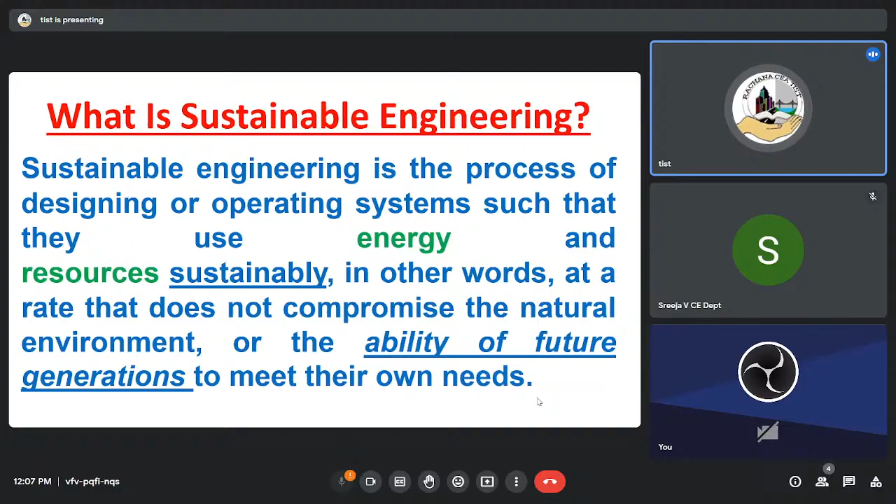Having understood the need for sustainable development, the UN in 2015 published the SDGs. I'm not going to detail them, but you all know the SDGs emphasize the interconnected environmental, social, and economic aspects of sustainable development.

I will not go into detail on all of them, but now there's a question of whether we can reach the set target. Time is moving very fast. Now we have set the deadline as 2030 - can we reach this target? That is the big question we have. Do we have conventions every 2 years, 5 years? We discuss, we pass new rules, but practically, can we meet this demand? So can we ensure the future we want? This is the question we have to understand.

Then we come to the question: having understood sustainability and the need for sustainability, why innovative solutions? As I mentioned in my inaugural speech, the current day issues are technically, financially, environmentally complex. Why do I say so? You all know my specialization is in water resources and hydropower. The potential in many countries has already been exhausted - we have harnessed whatever sites remaining are very complex, either geologically complex or with other technical issues, even equipment selection is in many aspects technically complex.

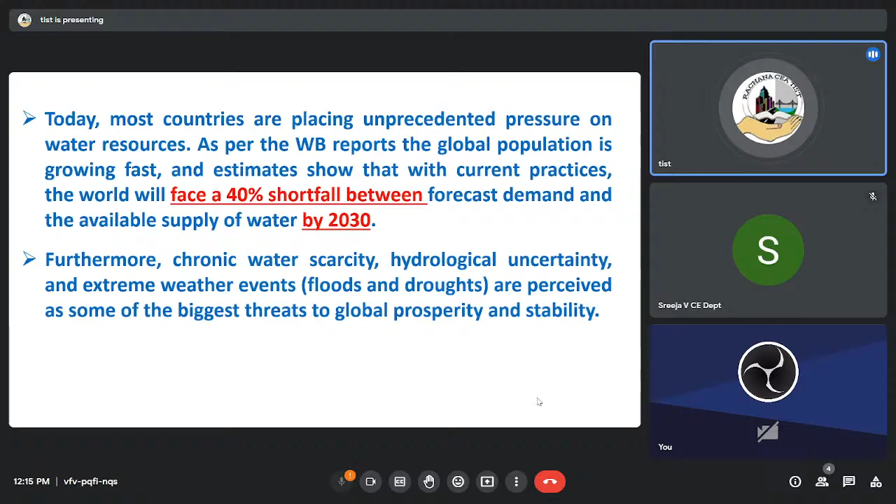Now, these are with all the SDGs and other regulations in place. Furthermore, chronic water scarcity, hydrological uncertainty, and extreme weather events - floods and droughts - are perceived as some of the biggest threats to global prosperity and stability.

Feeding 10 billion people by 2050 will require a 50% increase in agriculture production. That means, as I mentioned before, which consumes 70% of the fresh water demand - how are we going to meet all that? And a 15% increase in water withdrawals.

Besides this increase in demand, the resources are already scarce, and in many parts of the world, estimates indicate that over 40% of the world population lives in water scarce areas, especially Africa, and approximately a quarter of the world's GDP is expected to be exposed to this challenge.

By 2040, an estimated 1 in 4 children will live in areas with extreme water shortages. Water security is a major, often growing challenge for many countries today. This is just to emphasize the importance.

And also, if we go further, climate change will worsen the situation by altering hydrological cycles, making water more unpredictable, and increasing the frequency and intensity of floods and droughts.

Roughly 1 billion people living in monsoonal basins and 500 million people living in deltas are especially vulnerable. I think you all saw what happened in Pakistan recently. And the reverse happened in Malawi - one of the biggest reservoirs depleted completely. Lots of people were depending on that reservoir. So totally the opposite happened there.

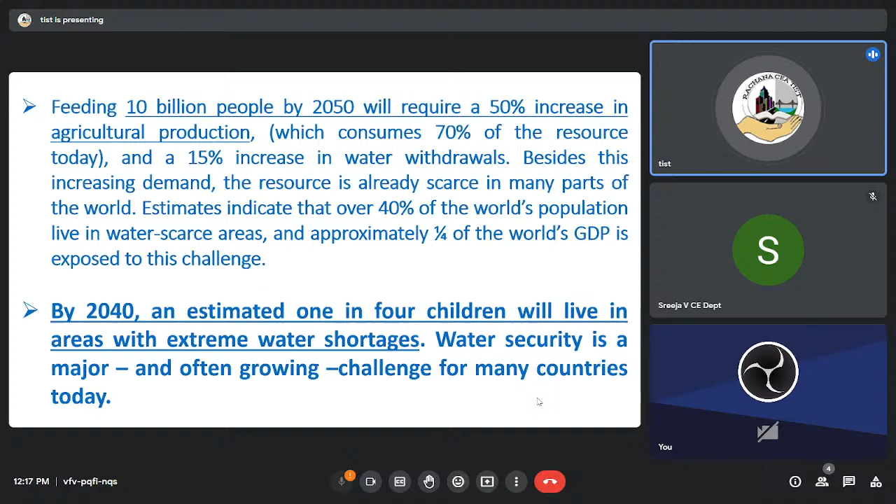The 17 UN Sustainable Development Goals set ambitious targets to date. Success in meeting the goals has been limited, and with 2030 less than 7 years away, it seems highly unlikely that many, if any, targets will be met. This is what I mentioned earlier, so this is a question we need to ask ourselves.

We also find that the public's perception of water availability is lacking. They have no concept of how much water they are consuming. For example, they estimate daily use per person is around 20 liters, when it is actually close to 150 liters. Education is a big issue, and the role of government and media in many instances is inadequate.

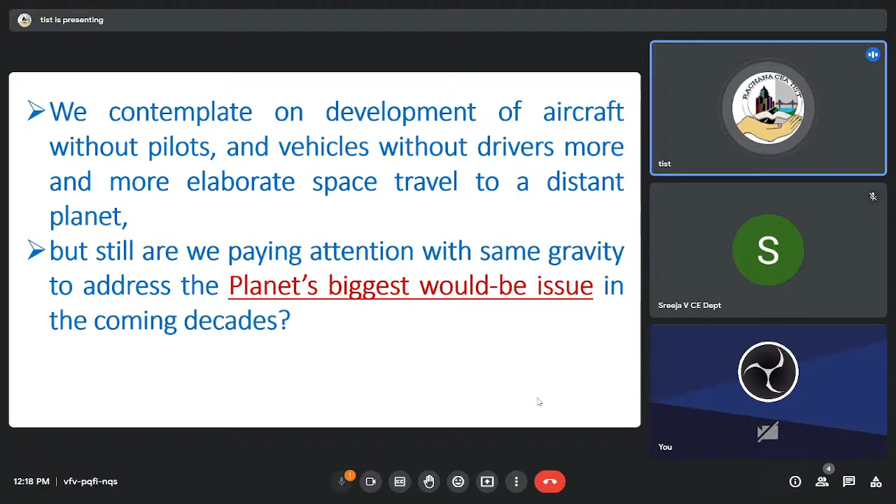So we complain that if you look at the research today in the world by developed countries, we contemplate development of aircraft without pilots, vehicles without drivers, more elaborate space travel to distant planets. We spend billions or trillions of dollars in this type of research, but are we paying attention with the same gravity to address the planet's biggest issue in the coming decades? This is a question we need to ask ourselves.

I quote a very interesting statement by a veteran water professional. Maybe you've all heard this, from the International Water Association Director General, Dr. Kala Vairavamoorthy. He mentioned this, quoting what his father told him. I think this is especially for the young engineers who will like it, it's a very interesting one.

He says, I quote him, 'We are the custodians of water. When you use water, think of it as taking a book from a library. You take it on loan and use it wisely for your benefit. When you finish using it, you need to return it in a condition knowing that someone else is going to use it after you, that you might want to receive it yourself.' Unquote. It's a very interesting message for the world.

So this philosophy stood in my country. I think, of course, in India, we are aware that the great kings of ancient India, 2,500 years ago, developed one of the finest hydraulic civilizations of the world. If you look at the ancient hydraulic civilization both in India and Sri Lanka, there are still some theories we can't understand. I want to mention one example.

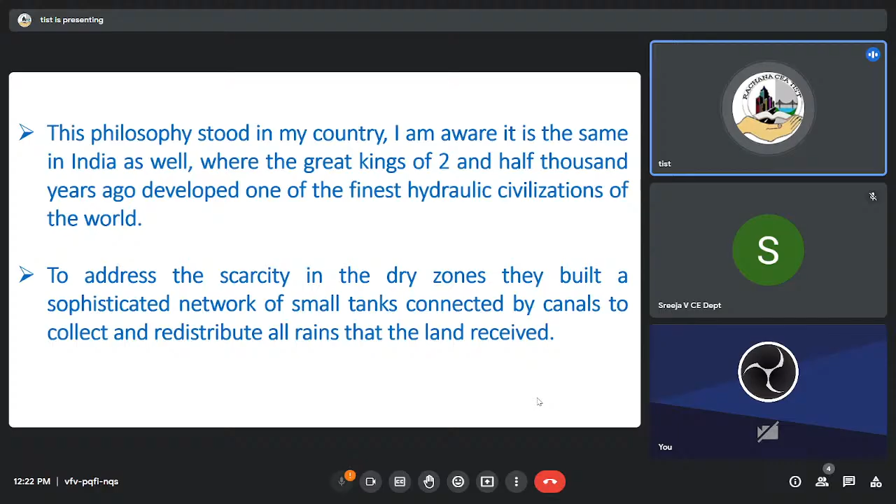He is actually a very honest and humble person. He said he couldn't believe, having seen our old canals and old reservoirs - today we design structures for a 100-year lifetime, but we have dams more than 2,500 years old. I think it's the same in India. So where are we? Where is this technology? How did we miss it, still?

But today I'm going to move on to this: these tanks were built in a cascading system using the natural topography of the land. The multifunctional system supported agriculture, wild animals, and biodiversity, allowed rice to be cultivated all year round, regulated the local microclimate, prevented floods, and controlled evaporation.

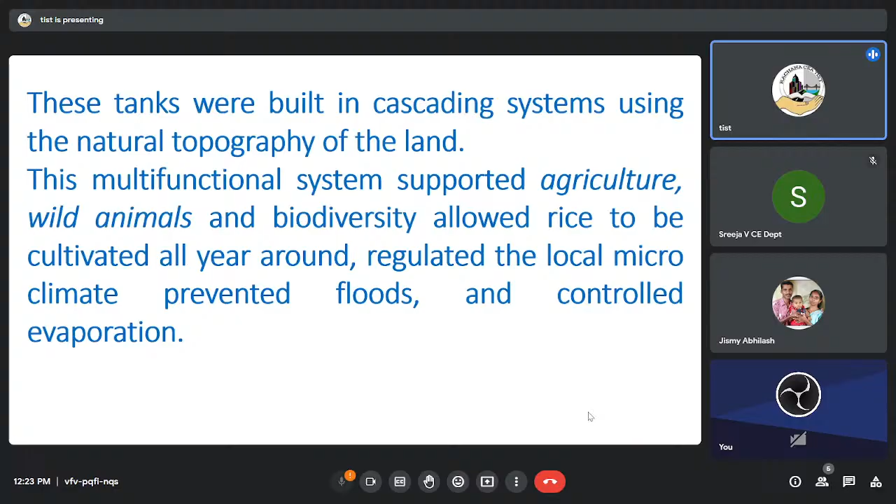But if you look at these systems, I have studied one ancient reservoir system - they have small tanks surrounding the main reservoir to catch sediments. That is how they planned it, so the main reservoir stays intact. They never faced a sedimentation issue. They also used various technologies for water release control, but today, unfortunately, we are still trying to understand the theories they used at that time.

So I found it very interesting - with this system poorly understood by modern day engineers, knowledge was lost and infrastructure was either neglected or allowed to be destroyed, particularly during the colonial era.

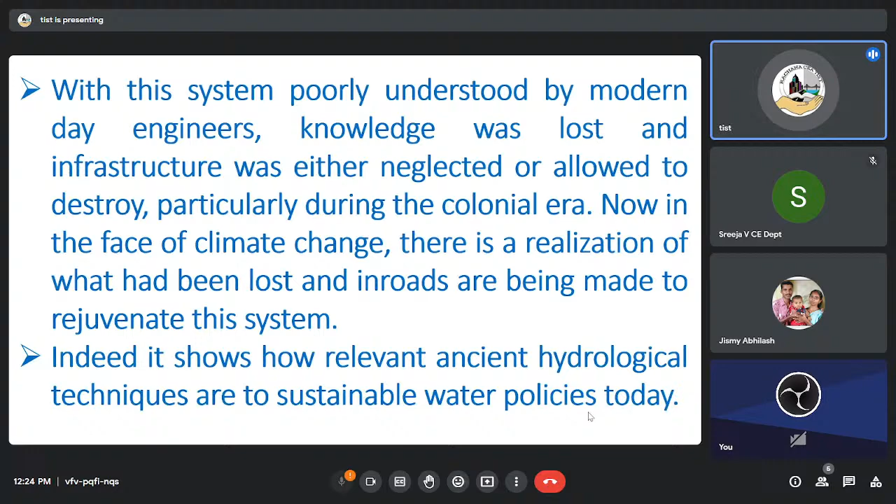Now, in the face of climate change, there's a realization of what had been lost, and inroads are being made to rejuvenate this system. In Sri Lanka, with modern day planning and all the new sophisticated software, we have developed water resources schemes. Some do not get sufficient water, some are filled with sediments, various issues.

But at the same time, when developing all this, we have ruined the old canal system. They were built along the contours, so we still do not know why they selected those particular heights and levels at those particular locations. By neglecting those, we build new ones with modern technology, but they have failed to serve the purpose.

So this is something we need to dig into, the ancient theories, ancient engineering, and see where we have gone wrong. Therefore, it's of utmost importance to conduct applied research to understand those ancient technologies and to see the possibility of engaging them in today's context as innovative solutions.

I think this is applicable to many countries. We all have a similar background, but unfortunately we have not paid attention. You may have heard about the fortress in Sri Lanka called Sigiriya, nominated as a world wonder. We are trying to find out how they pumped water up. There are swimming pools used by the king, and we find pipelines constructed on the rock, pieces of old pipes also there, but still we do not know how they pumped water up to that level.

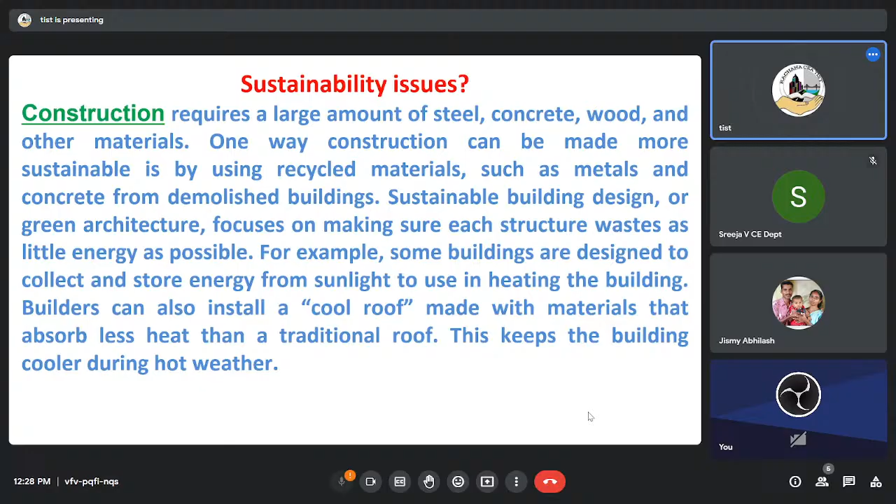So again, under construction, we need to think about sustainable sites, that is selecting sites, then water efficiency - large construction sites are connected with huge water demand. Similarly, materials and resources, energy and the atmosphere. So when we address the construction sector, it covers a large wide area of items as I have just listed, and there we can have many innovative solutions.

Yes, I think if you check, many institutions are doing research on alternative materials. I think we have gone very far - we have done in-depth research and found many alternative materials, and they are being used. So similarly, most of these areas have been covered.

Then under innovative solutions, the other possibility is engaging digital construction. I think we have started this in some countries, already using digital technology in construction. Globally, the built environment footprint is expected to double in size by the year 2060.

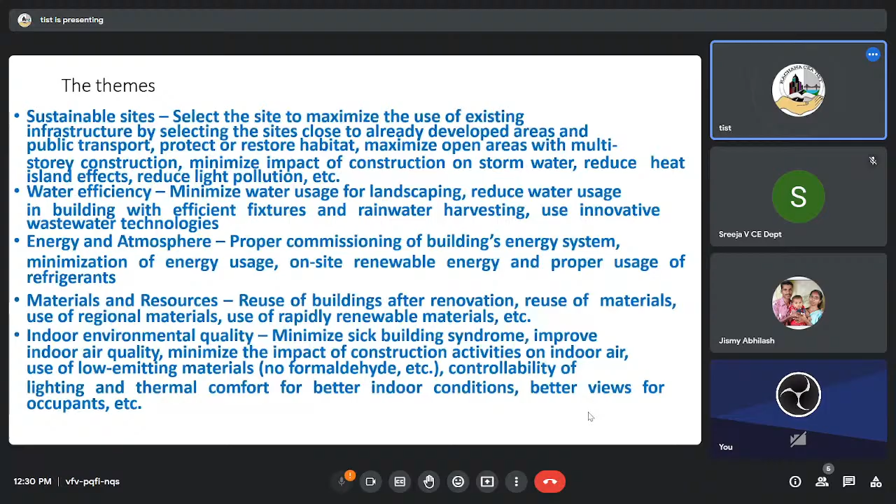For this to happen in line with the net zero target set by us, technology will have to play a lead role in improving the way construction is carried out. I think you're all familiar with the targets now in Sri Lanka. Our net zero target is 2050. That's the target set by the government, but we're not sure whether we can get near to it. I think similarly in India you have your own green energy targets and net zero targets, but to be realistic, this is one major area we need to be concerned about.

Getting into digital construction can be considered one major contribution. So for technology to advance our construction techniques, digital literacy is going to be required in all practices and all phases of construction. I think you're all familiar with BIM.

BIM is widely used, but we can't simply put BIM in directly, so we need some preparatory work. There are cost constraints, it's not all projects we can adopt it for. We need to use it from the pre-construction process to final O&M. But some stages we can directly use, to put it in the full phase you need to do more.

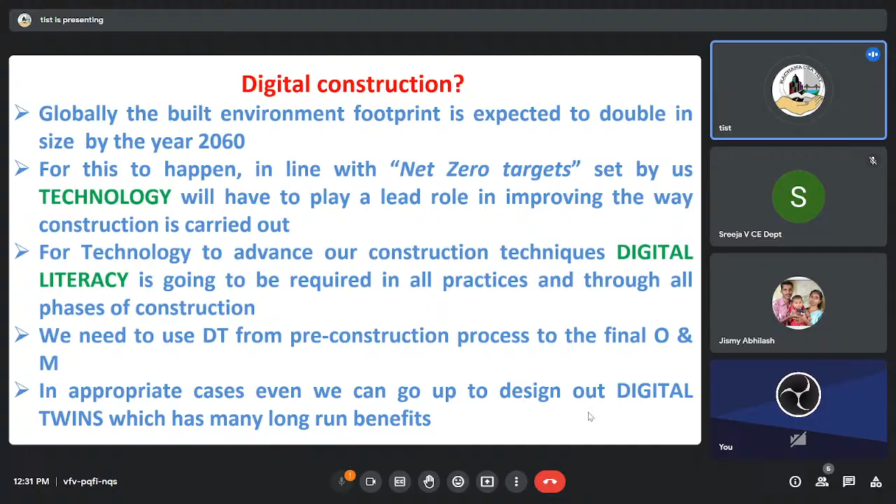So to make this a practical reality, the technology will have to be easy to develop, deploy and adopt, as I mentioned earlier. If deploying technology requires weeks or months-long training on the ongoing work, it will not happen. The developers or clients will not agree to do that because it involves cost.

But in the long term, we need to get ready with our university education, our training colleges, and through various other programs like CPD programs, we can apply this for practicing engineers. So in the long run we need to invest more in improving digital literacy, especially by the contractor. We have to build up the required digital muscle in organizations. In all the major organizations we need to give more concern to digital applications in the construction industry. That's why I said we have to have a separate arm for digital muscle to be successful in the future.

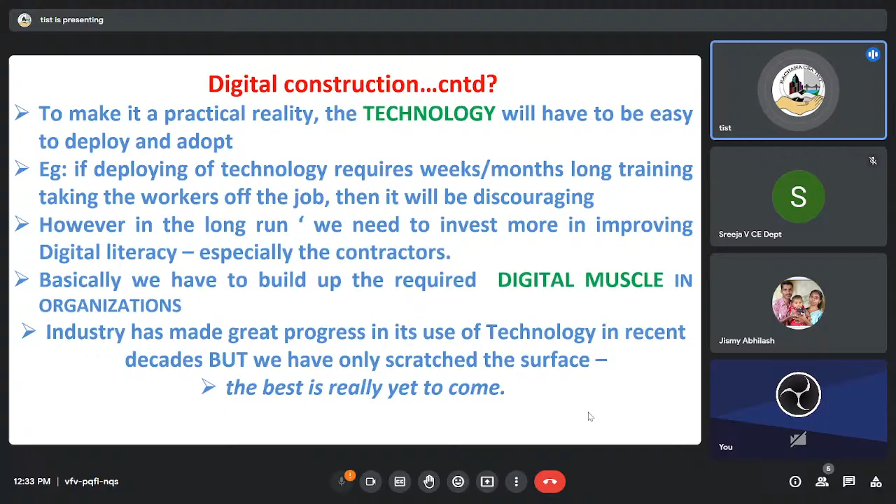The industry has made great progress in the use of technology in recent decades, but we have only scratched the surface. The best is really yet to come. With digital applications, you can do more in this sector.

Next, I'd like to talk about energy sustainability, the other important area. The energy sector is undergoing rapid transformation with the adoption of new technologies and increasing focus on sustainable energy solutions. The transition from fossil fuels to renewable energy sources is gaining momentum, and new innovations and trends are shaping the industry's future. Most countries have defined their renewable targets by now.

In Sri Lanka, the government target is 70% renewable by 2030. When you say 70%, we have already exhausted our hydro potential. The rest we have is mainly solar and wind. Yesterday I learned that your airport is a totally solar powered airport, from Dr. Vasudev, so it's very interesting. There are many such initiatives we can do in the energy sector.

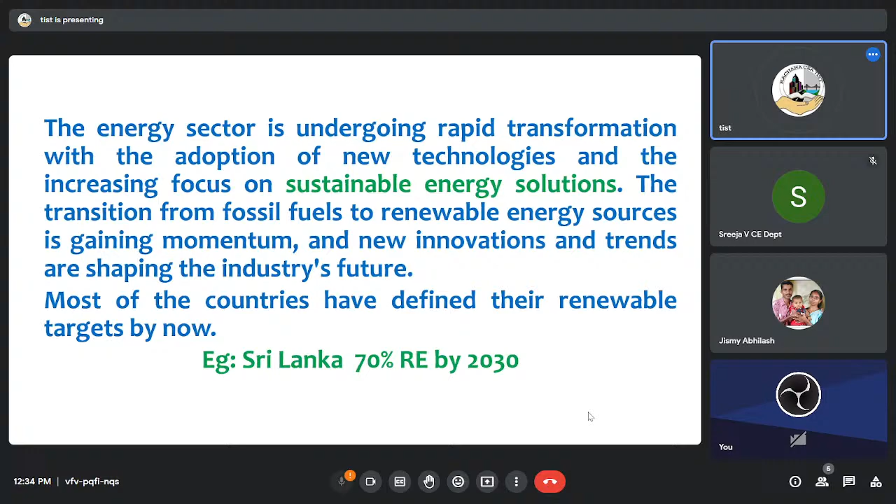But again, as you all know, the problem with renewables is intermittency and cost. So can a country like us simply be 100% dependent on solar? No, it's not possible because there are technical constraints, and also economical ones, because though solar is free, the conversion mechanism is expensive.

The future technology says solar cells will be printed like paper. I've read somewhere that in Germany they've already made the breakthrough, and it is coming to commercial operation soon, so that solar cells can be printed on any surface, curved or anywhere, like normal paper printing, and you simply connect the circuit and get the power. So there will be drastic reductions in cost in the future, and similarly for wind energy.

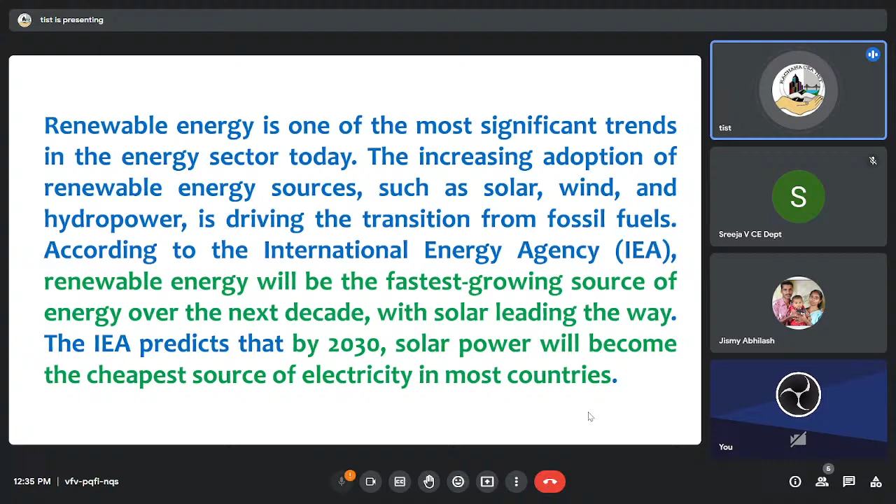Renewable energy is one of the most significant trends in the energy sector today. The increasing adoption of renewable sources such as solar, wind, and hydro is driving the transition from fossil fuels. According to the International Energy Agency, IEA, renewable energy will be the fastest-growing source of energy over the next decade, with solar leading the way. The IEA predicts that by 2030, solar power will become the cheapest source of electricity in most countries, and the future will be solar because our existing petroleum resources will deplete.

It says in 50, 75 years, right? But again, these are the predictions. And also with the coal and other thermal, with the climate change, the global warming, can we use it? Today, I think climate change is, I think we all experience very much the serious drought, serious floods, all that. In many places we see that these are results of climate change. So with that background, can we use those resources although we have sufficient quantity?

So renewable is the only answer. And again, the barrier is with the technology and the cost. So for that we need alternative solutions or the innovative solutions. So these are the areas we engineers need to focus on.

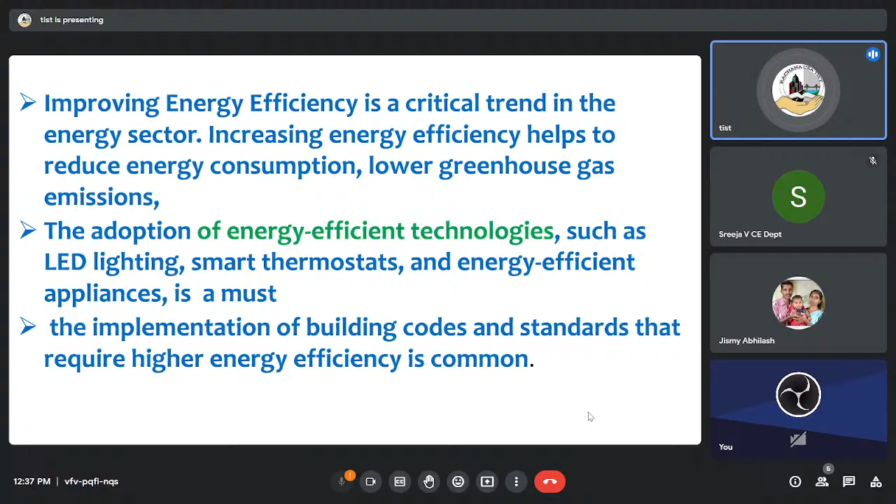The adoption of energy efficient technologies such as LED lighting, smart thermostats, and energy efficient appliances is a must. So the implementation of building codes and standards that require higher energy efficiency is common. Same way we use find new technologies, we also need to have our regulations also in place, otherwise you can't simply adapt it. So those are the basic main areas I want to touch under the sustainability.

Now I want to share some experience in the innovative solutions in Sri Lanka used by our industry. Next please. So some statistics about Sri Lanka.

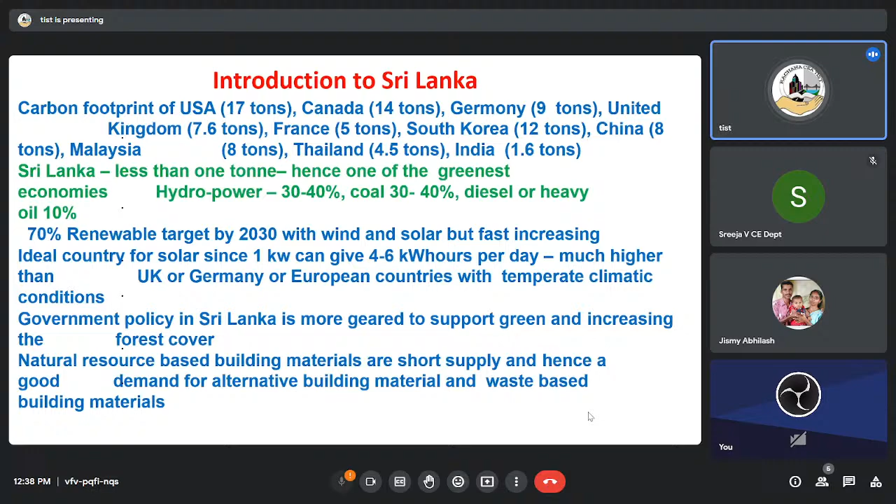The government policy in Sri Lanka is more geared to support green and increasing the forest cover. So that's also one concern under environmental sustainability. Natural resources based building materials are in short supply, and hence a good demand for alternative building materials and waste-based building materials. Now, energy sector, yes, we can go in the renewables.

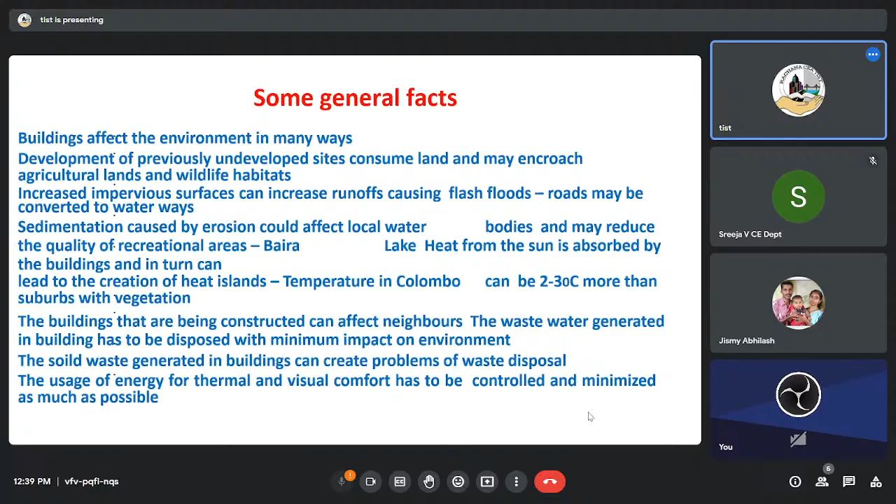In the construction sector, the innovative solutions we have done it mainly on the construction techniques and the materials. Yes, the different building materials. These are actually based on some of the university research, and they are being used at the moment, not in full commercial scale, but in small scale. They are being used, but soon it can come into full commercial scale.

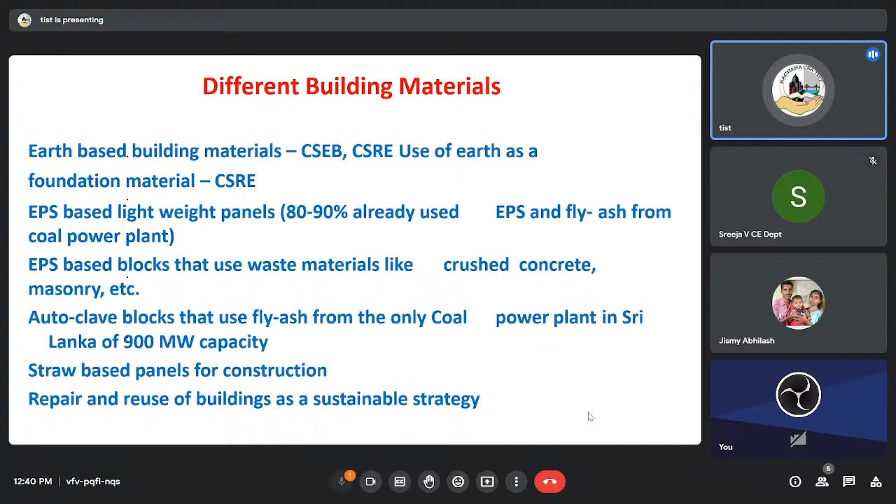I think maybe some of these you used in India already, you have done research. Then also we have an application with a straw-based panel for construction and repair and reuse of building as a sustainable strategy. And very recently they also introduced, normally in buildings we used to adopt 4-inch thick walls as partitions. So with the research they have done, they have found there is sufficient strength to reduce it to 2.5 or to 3 inch. There are practical limitations of construction, but still it's also a cost-saving solution and it has been identified as an innovative solution.

So the strategies are to minimize or mitigate. This is the water sector, what we can do under the strategies applied in Sri Lanka. So the stormwater

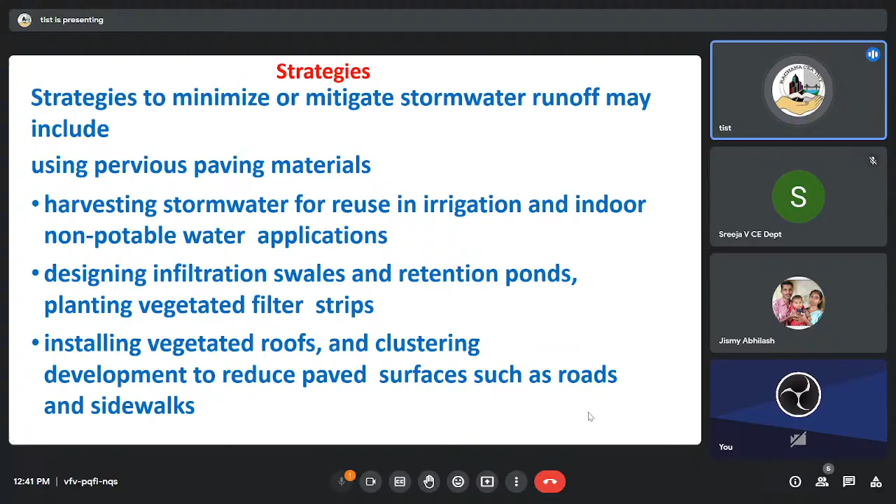runoff may include using pervious materials to reduce the surface flow. We're using pervious paving materials on the clay to absorb the stormwater, and also harvesting stormwater for reuse in irrigation and indoor non-potable water applications, designing infiltration swales and retention ponds, planting vegetated filter strips, installing vegetated roofs, and clustering development to reduce paved surfaces such as roads and sidewalks.

So these are some of the innovative work done in Sri Lanka in the construction industry. These are the pervious layers or the kind of bricks that you can use for surface laying, and it will absorb and transfer the water to the ground while reducing the surface flow.

It helps to reduce floods. If you look at now, most of the time we experience severe floods because of the extensive rainfall intensity that we experience currently due to climate changes, and our design waterways are not sufficient to cope with it.

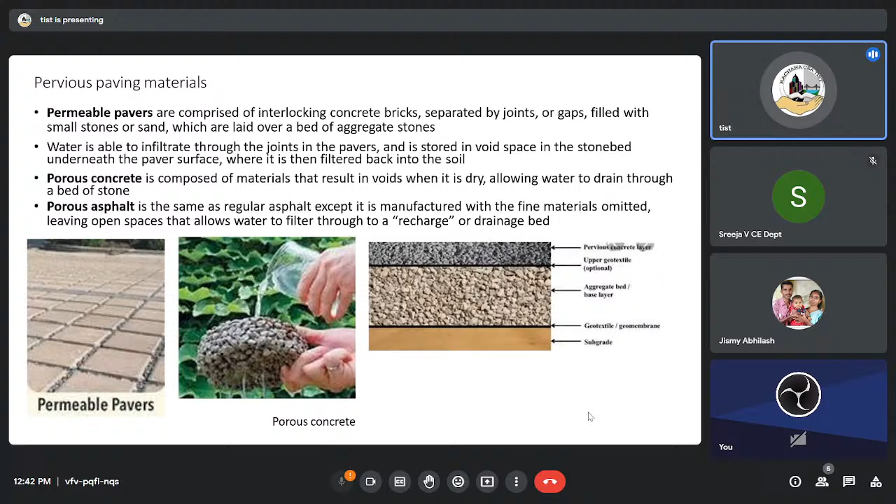So these are some solutions we can use in the public, private roads and the common areas, and also the techniques to prevent surface erosion. These are very basic.

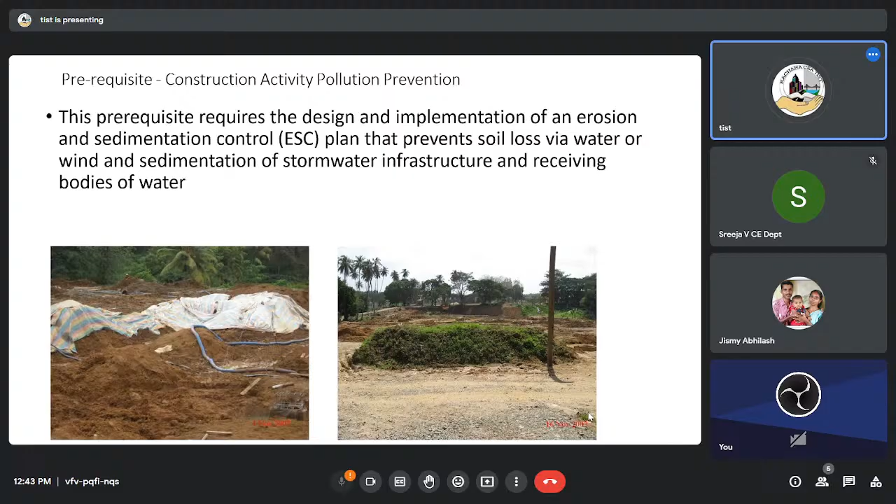This again is similar permeable paving methods they have developed. And this is the swales I mentioned. So without huge drain construction with concrete walls or rubble walls, a similar swale can be introduced, and it's environmentally friendly and also good in appearance, and it will drain the surface runoff without making a flood condition.

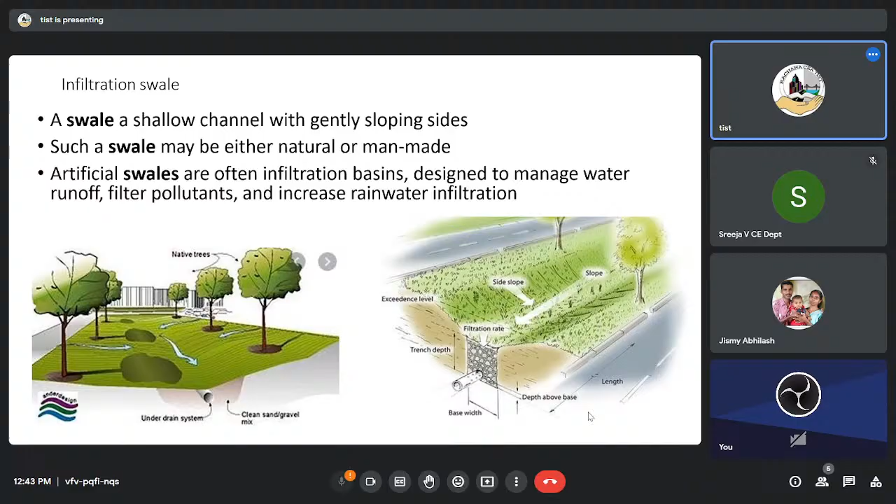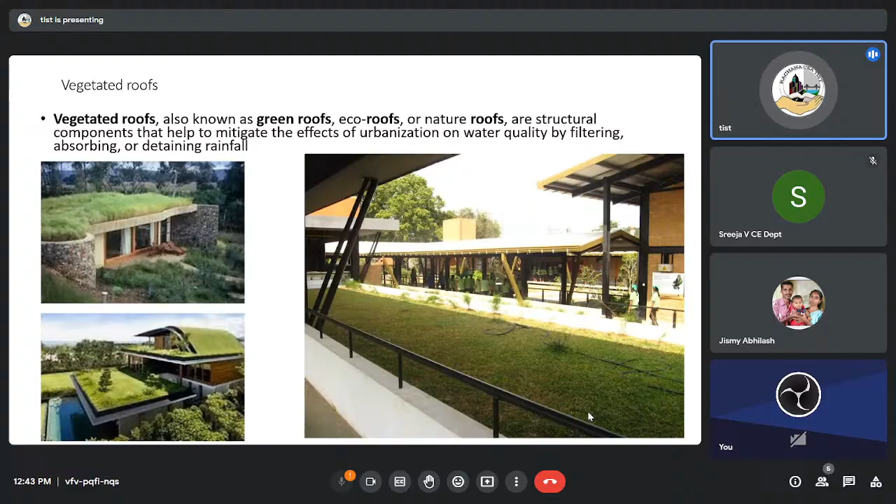So these are some of the photos I copied. Surface rooftop gardening can reduce the heat load of the buildings, and also help with sediment control. Okay, so I can share this presentation with you and go into details.

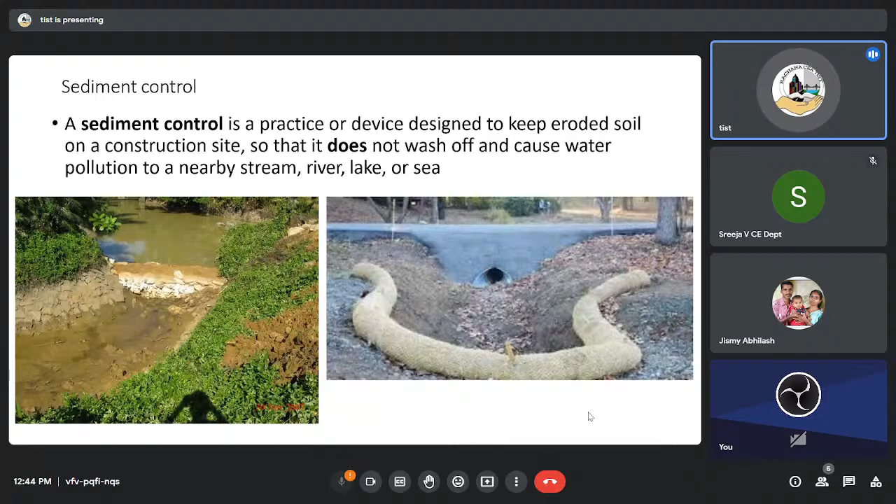Use of daylight is another possibility - in our design we do a mistake. We cover everything and we put light to increase the light level. So why don't we use sunlight directly? This is also one mistake we do in planning. We have not thought about it.

So this is also one aspect, and there are 3 such buildings they did with minimum artificial light usage. One is a library, and the other 2 are common buildings. So that way also we can consider it as an innovative solution, and we can reduce the demand of energy in a building.

Then also the material usage - buildings without plaster, that also you can do a great saving, with good appearance if we plan the construction properly.

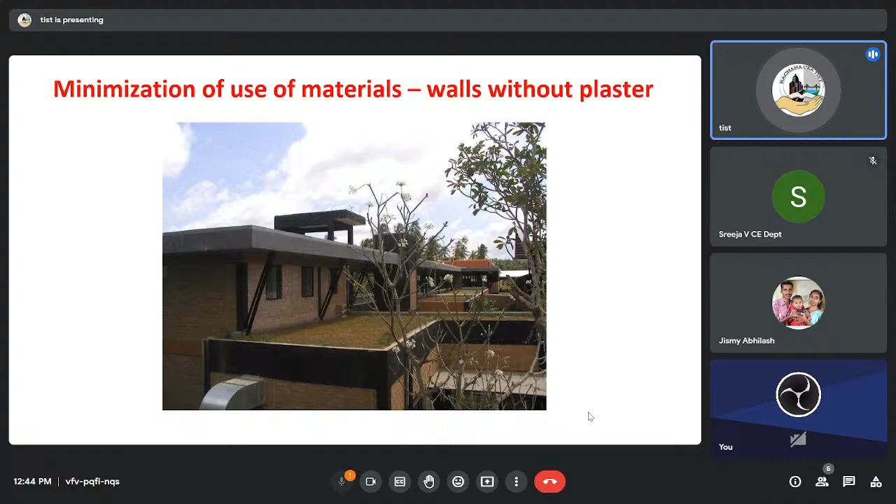Yeah, we discussed about the green roofs, and also allowing native trees that will not need extra water for survival.

Actually, now during construction, what we do is simply remove everything and start building. Then after that, we go for landscaping. We get the services of a landscape expert. We pay and plant new trees and try to create a result. But if you plan at the planning stage, and consider if you can leave those, it will help the environment and also help control the groundwater.

So artificially created ponds capture stormwater and save water used for irrigation. Actually, if we can capture this water - I have read that in the US they have schemes during high flood time where they arrange that water to recharge the underground aquifers.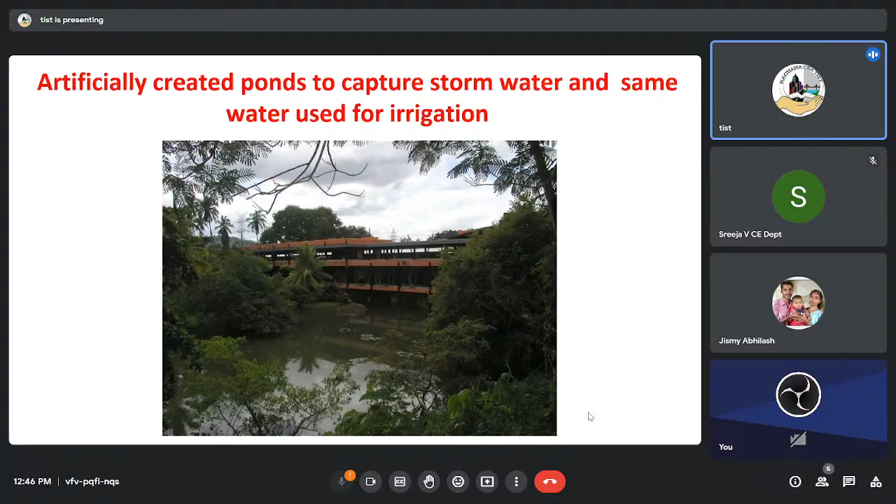So rather than it being wasted, you can use it to recharge the aquifers. I think this is something we recently discussed, especially in Sri Lanka's northern part, Jaffna, the closest town to India. There's a huge water issue, a water problem. There's no sufficient water because the subcontinent is on a limestone base and it's saline water you find. You don't find natural groundwater there, and even though we have water lenses, it's also very limited.

So artificially you need to supply water. But with climate change, they also experience severe floods. A few years ago we experienced this, and now it's frequently happening. So then we are thinking of the possibility of why not use this water to recharge the huge complex of aquifers we have there. So these are the possibilities, new areas we need to do research and study.

So again, this is on timber, using timber in an innovative way in constructing a building. Then also when you have water bodies, as I mentioned, the natural ponds to collect storm water, we can make the environment also beautiful and attractive.

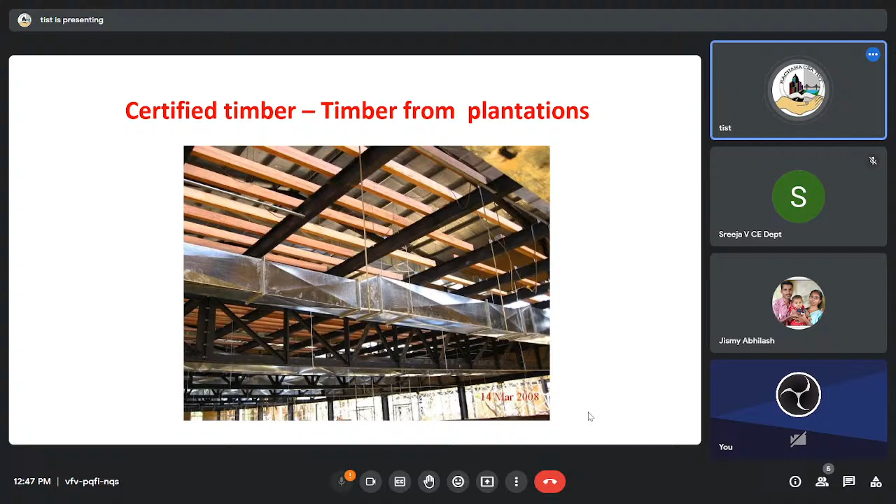So this again is a picture of a factory, the nature - and this landscaping, you can also use CSRE material.

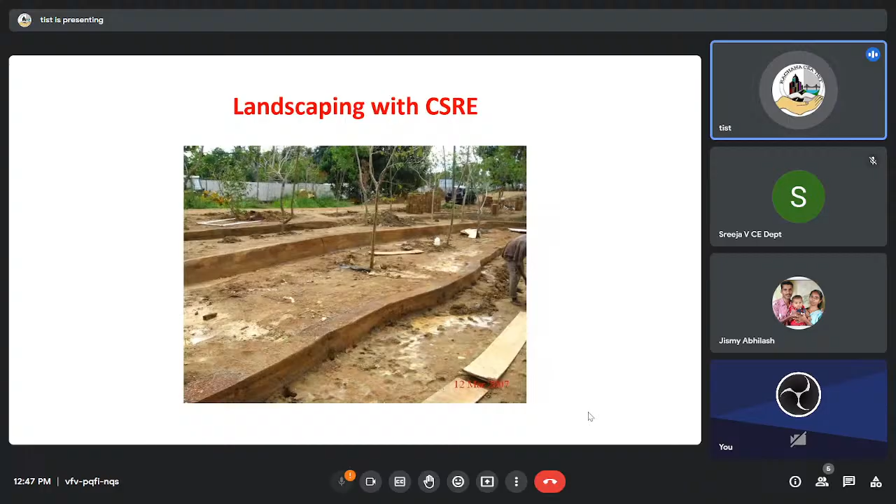This is a cascade system they use. This is one major factory in Sri Lanka - they have adapted all this in the factory premises, and it's an award-won location. It is a place to visit.

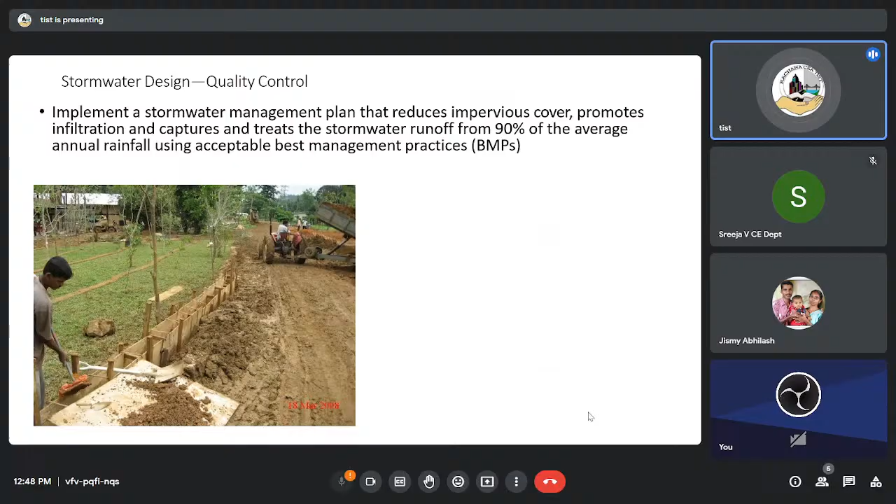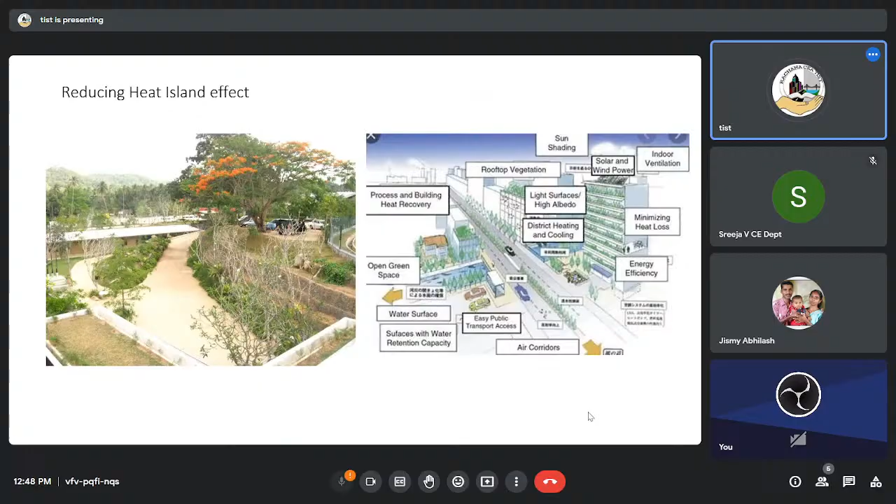So there are buildings, all energy efficient buildings. The surrounding premises also use various techniques like this, and it's a totally environmentally friendly solution. So this type of technique we can use if we plan carefully from our inception.

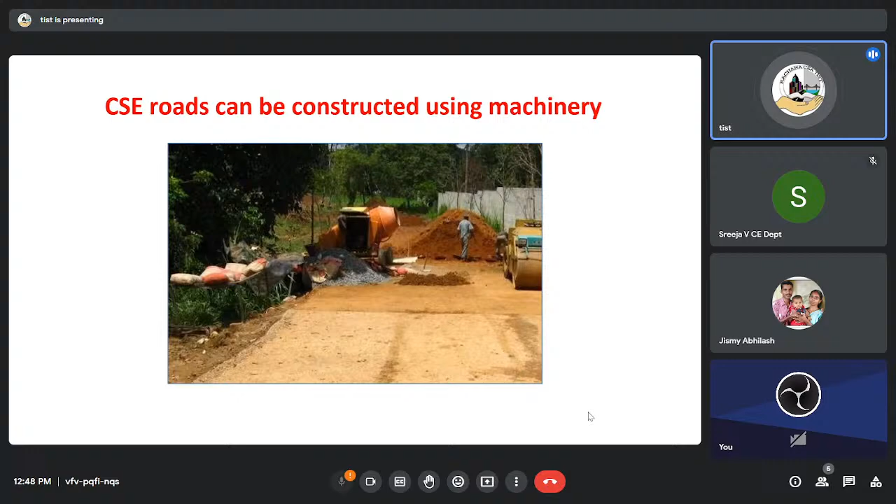Yes, so a similar photo here. This cement stabilized road can be constructed using machinery. Here, you can see a cement stabilized road used inside the factory premises.

So the other advantage is that you can minimize the heat. This is called the heat island effect. When you have paved surfaces, it increases radiation and reflection, which affects the buildings, and then you unnecessarily consume electricity on air conditioning. So with this type of solution we can reduce the energy demand.

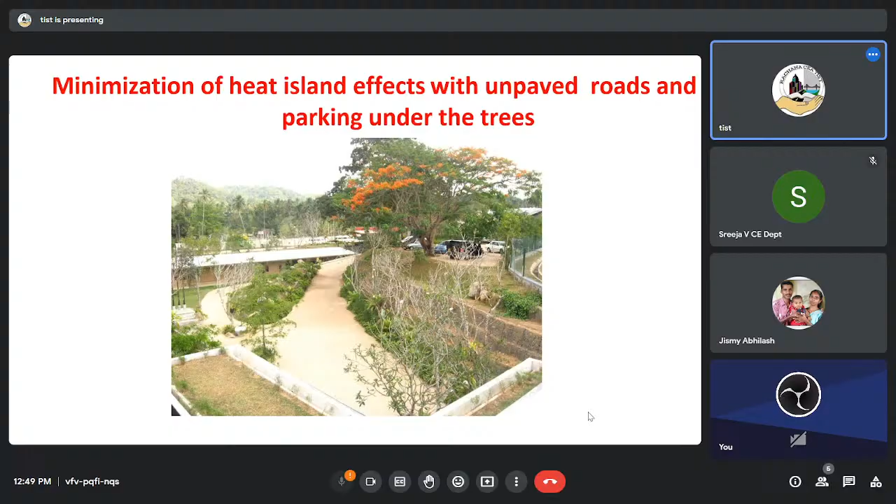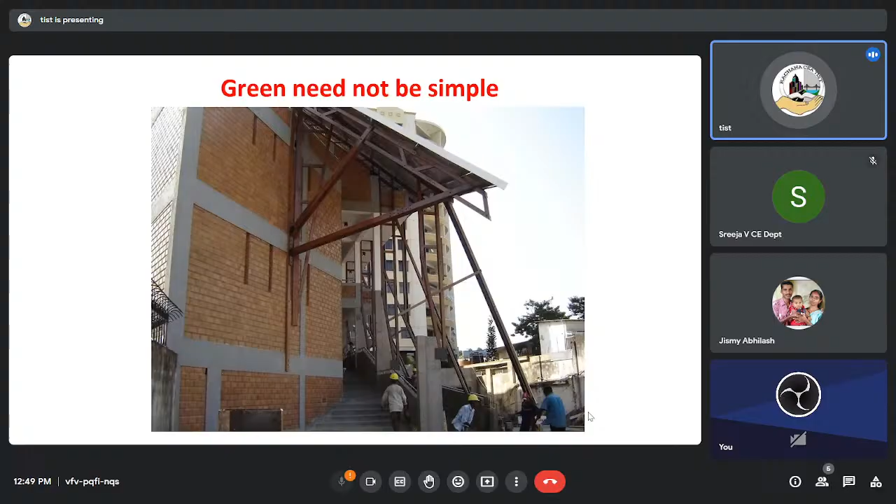This is the famous art center I mentioned. There they have adapted this type of technology. Another view of the same building - you can see no plastering in the finished layout, and also the use of low heat emitting water-based paint. By using that also you can reduce the energy consumption. So these are the techniques we can use.

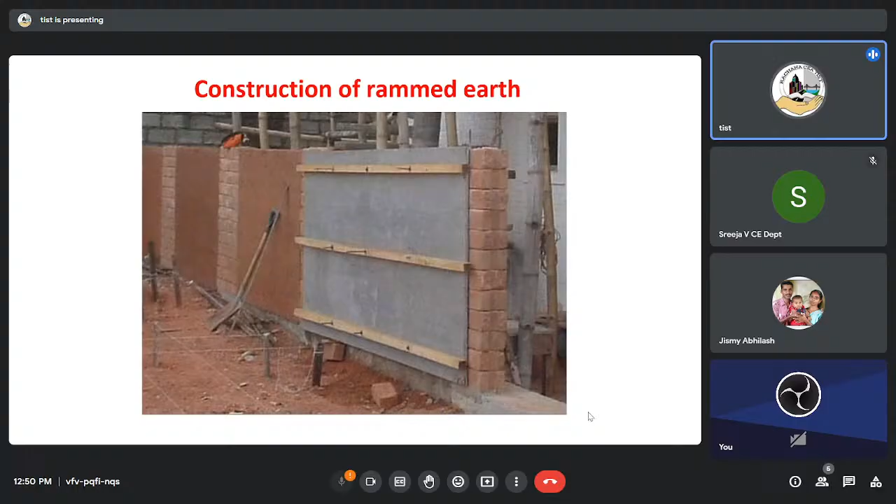This is the earth ram construction used in the southern part of the country. This is put into use, and the research done by one of our leading engineering faculties has successfully proven it as a product we can use for practical usage. After that, you can complete it like in a normal construction, you don't feel it. It's also rammed earth, you can see after completion.

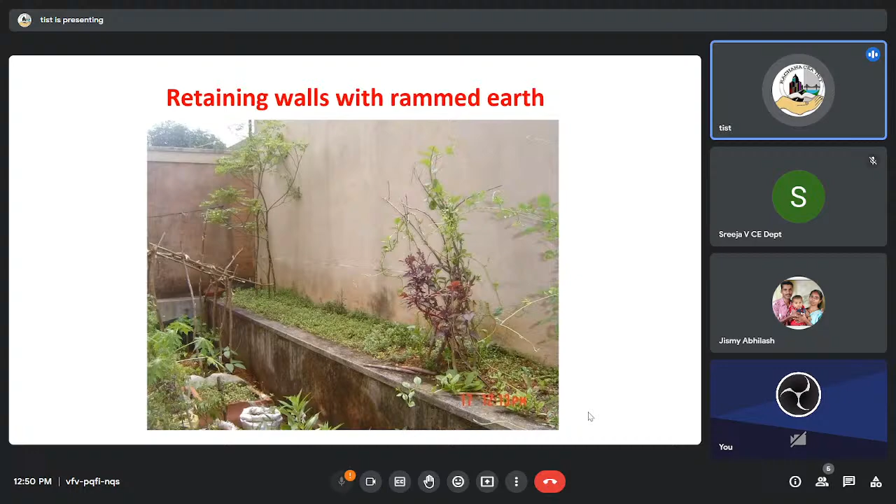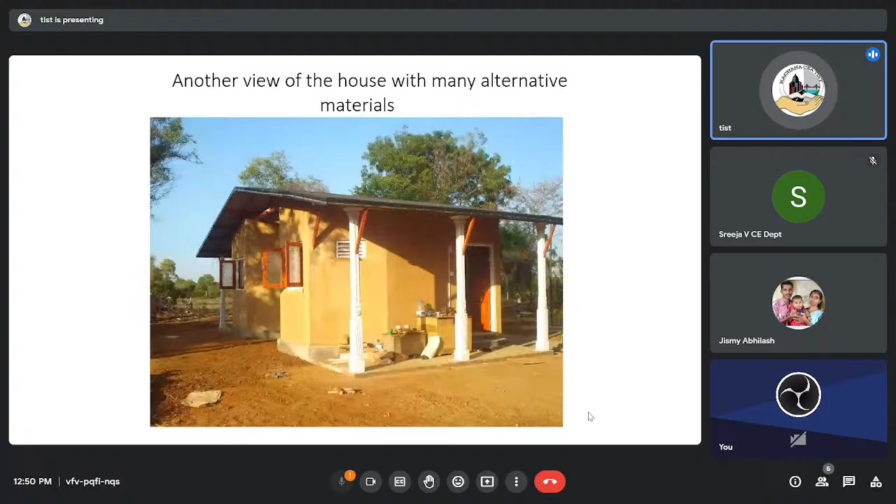Similarly, rammed earth wall houses are being built. There's one model village for poor people - they need a house to live in at a very minimal cost. So this type of construction can be done, and also the advantage is the material you can find from the location itself. This is done in one place in Sri Lanka.

So again, we have a library also built with rammed earth walls. These are the views from the same building, interior views. And also later, if you want, you can do improvements which you want to do.

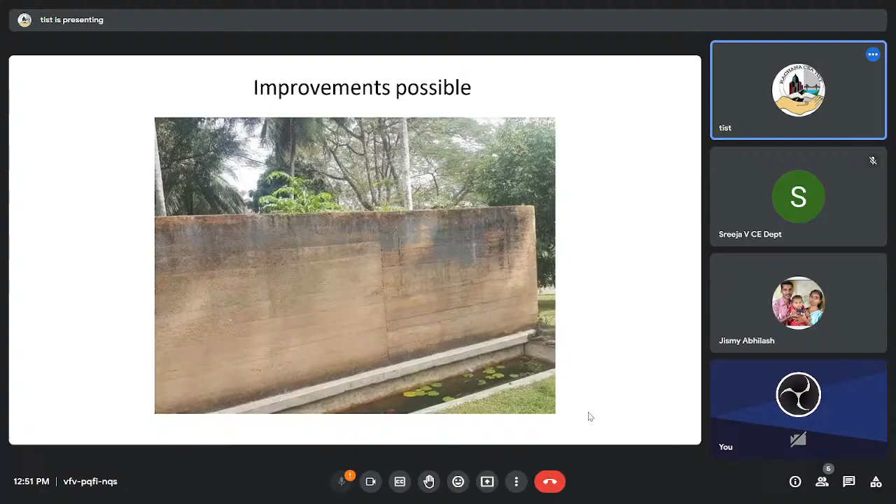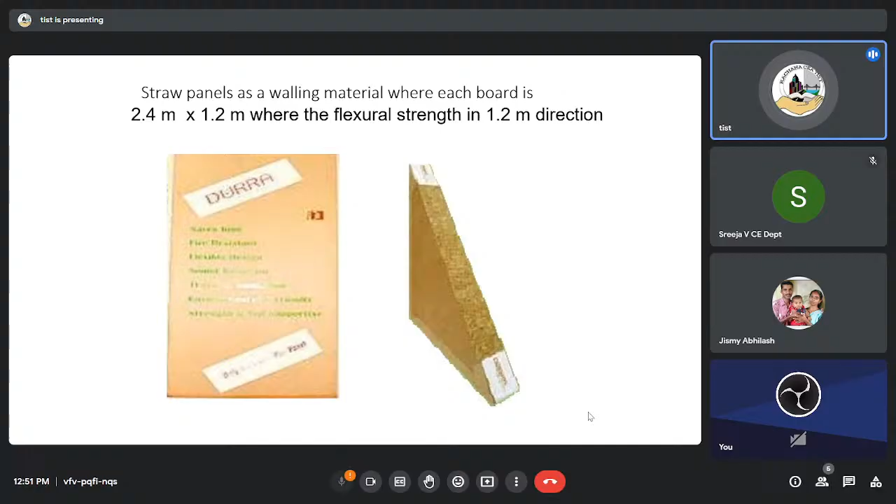This is CAC I mentioned. Then this is the other innovative solution they have found - panels with straw. They have done the lab test and confirmed that this can be successfully used, and now it has not come to commercial usage, but it's possible because in countries like India you have enough straw from paddy fields, so this can be successfully used in construction.

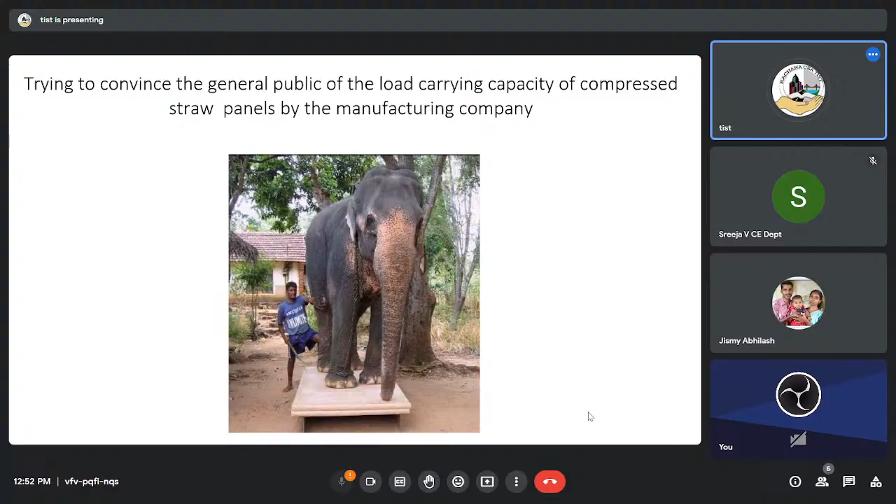So this was done in the demonstration. And also multi-story buildings with steel frame and precast panel. If you look at the construction industry today, we waste a lot of resources because of the technological gap. If you look at single story or two-story buildings, no engineering inputs are normally used - this is only the experience, we call it Vasudhane in our language.

They do the same thing whether it's strong ground, poor ground, whatever the ground condition, whatever the topography - they know only one technique, they use it. As per engineering basics, if you're using columns or beams, you need columns to transfer load. Sometimes structurally we have load bearing walls, then you don't need columns. But if you look at the way construction is done, you have huge columns, again thick load bearing walls, on top of that beams, everything. If you analyze it, do we need all this? No, but unfortunately these are not regulated, though we have various stages of approvals in various councils or local bodies. Even when there are technical officers, nobody looks at it.

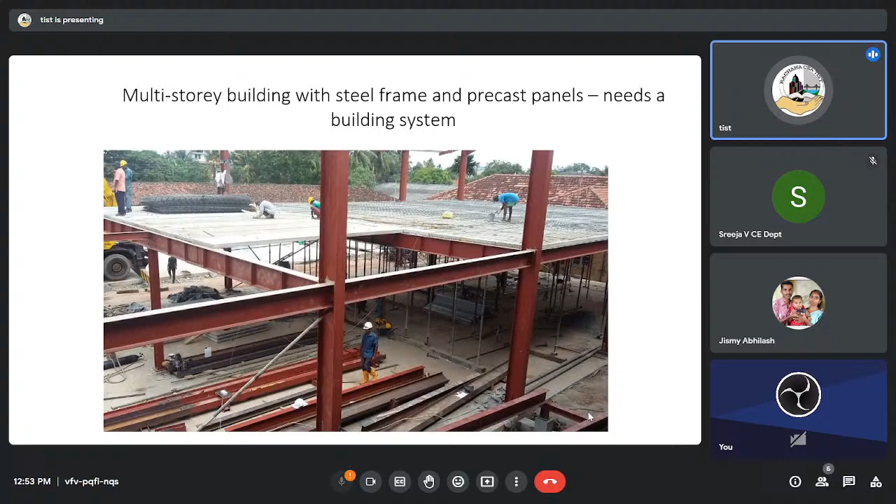So we waste lots of resources. Sometimes even a building or a factory building, maybe we can go with a solution like steel frames and precast material - it can be a good solution, but we are not looking into this. This is also one aspect we need to look into, because we have no right to waste world resources. One can say this is just money being spent - no, but these resources belong to all of us, and especially for the future.

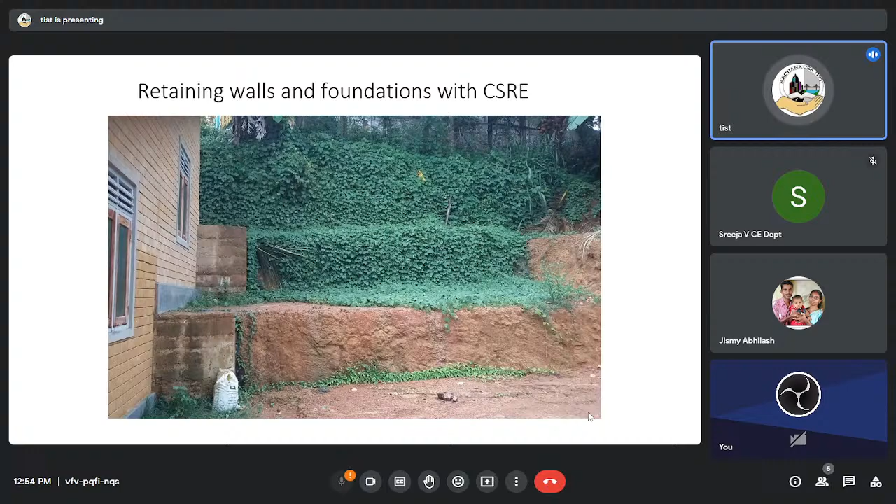Again, similar thing - retaining walls done with foundation with CSRE material. Another view of that building I mentioned.

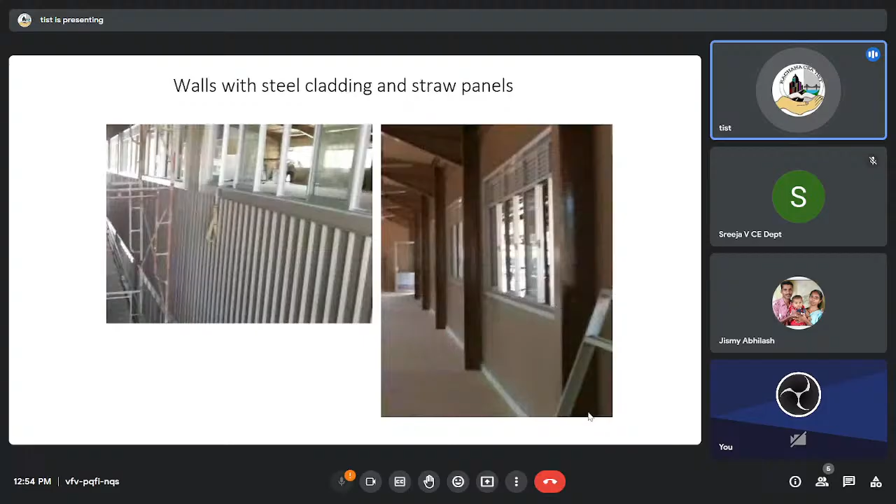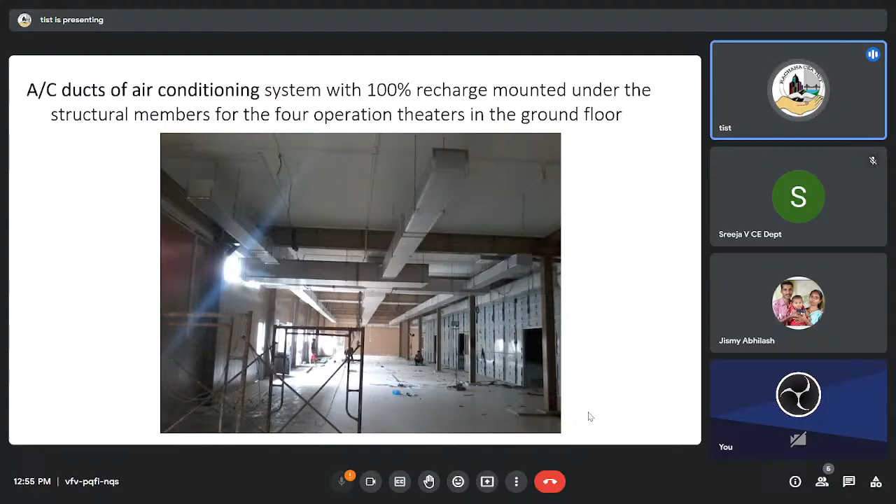I think you can go into detail because various possibilities are there in the construction industry, and this type of construction now widely used in Sri Lanka is a very cost-effective solution. Sometimes you have the problem convincing people because they are scared even when a chartered engineer certifies it - they say no, we are not sure this type of construction whether we can use. So the government, in their installations, can use and show it as proof. There are many ways we can do this, and we need to start immediately if you are truly concerned about future sustainability. You can see the wide span without columns.

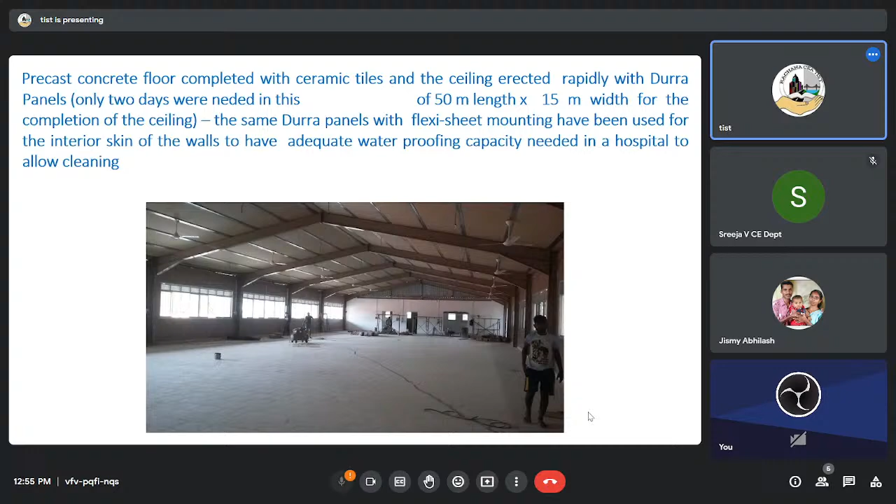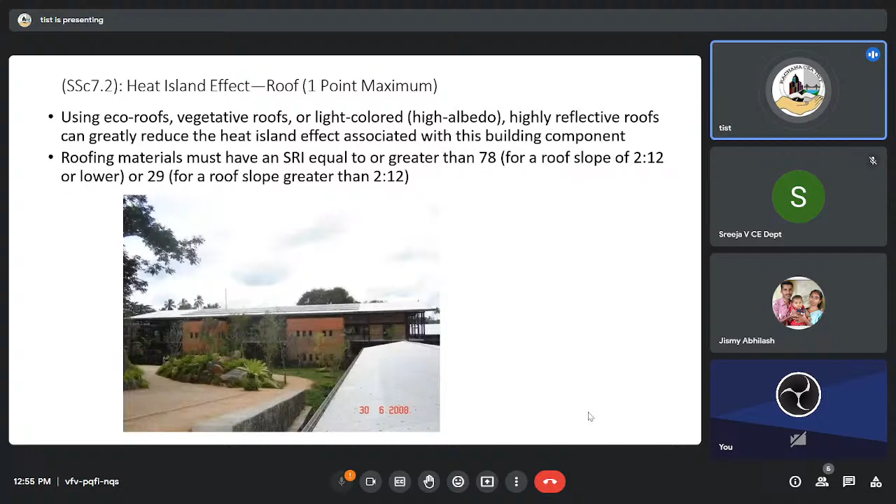So, eco roofs. If you look at it, as I said, we cover inside as much as possible and use artificial light, and also we expose the roofs and put air conditioners to lower the heat. So if we can avoid that in the planning stage itself, we can make a very successful, sustainable design.

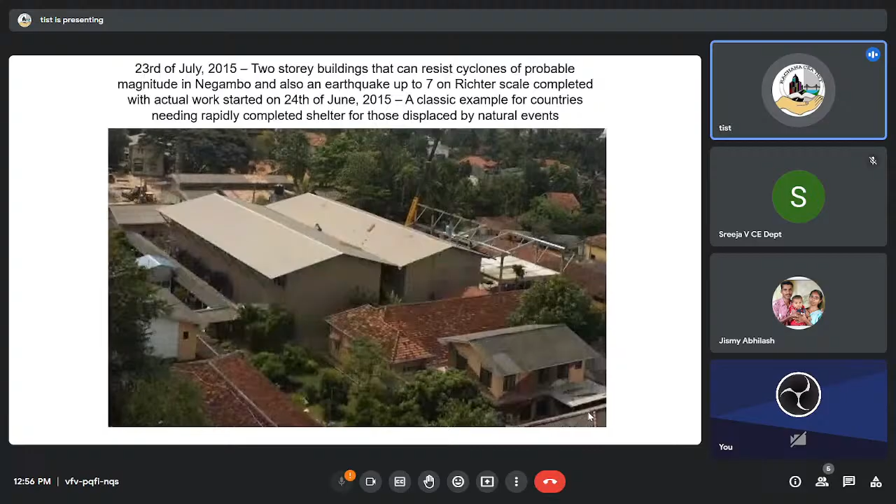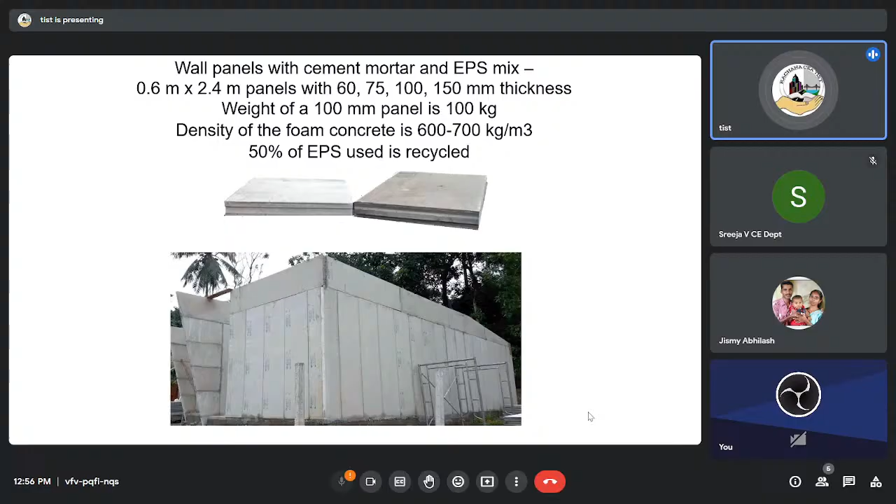The rural housing problem is a serious problem in most countries, especially developing countries. I think this type of solution can help a lot, and with a minimum investment, we can help a large population. So it's necessary that we concentrate on this type of technology.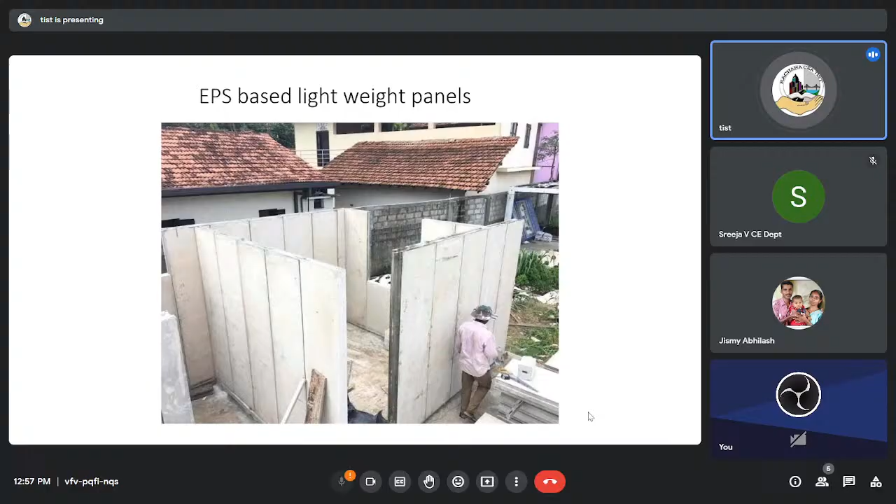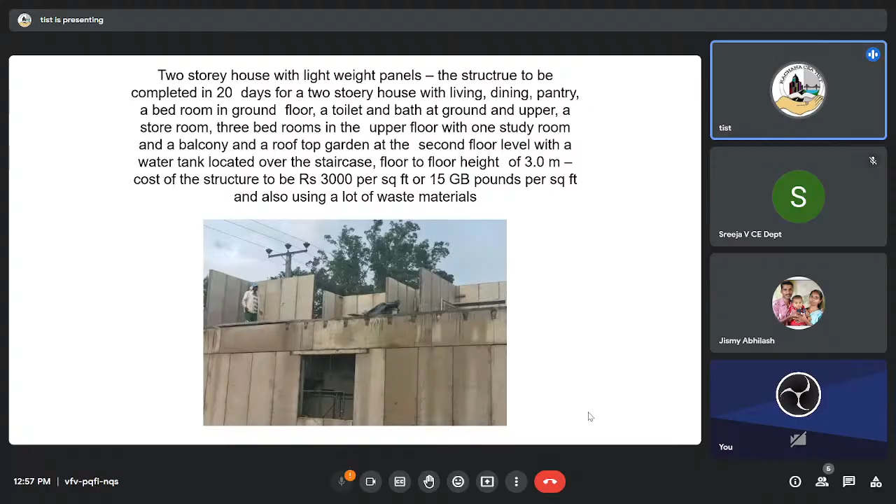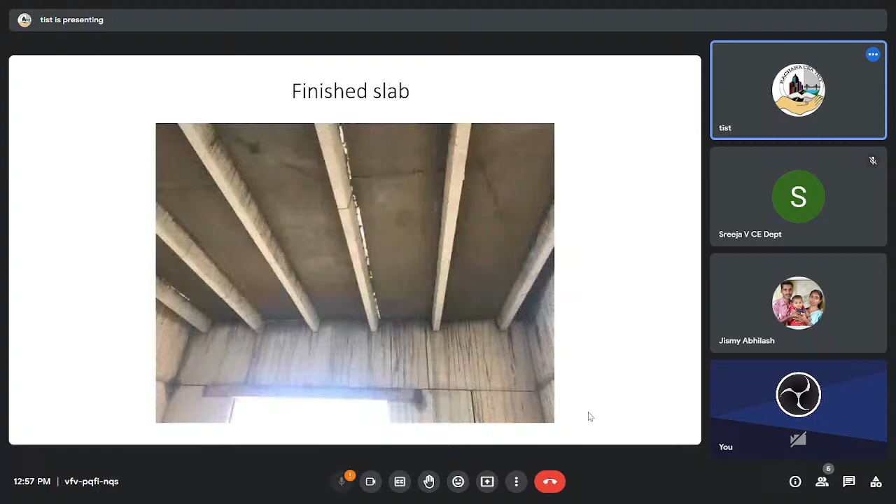This is a similar one, going for a 2-story building with pre-stressed beams, and on that we construct the slab without formwork. Even the staircases, if you can fabricate, you can make lots of savings - material savings and cost savings.

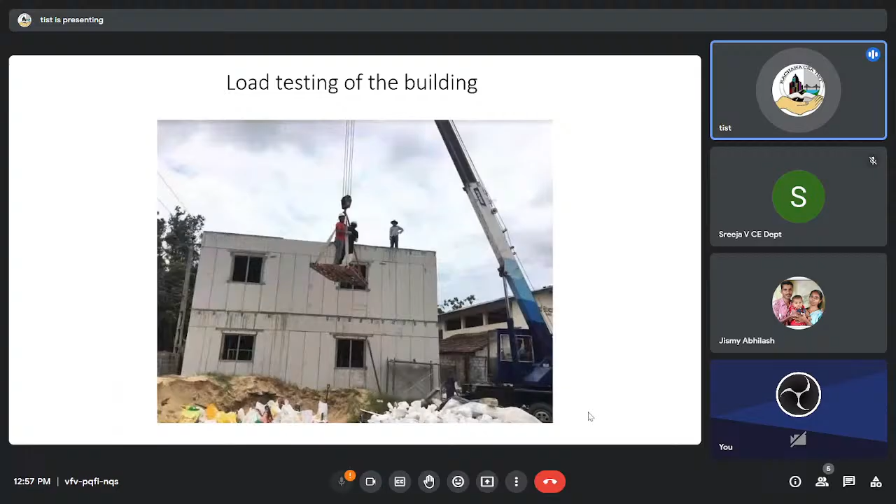Now this is the one I mentioned. They are doing load testing with sandbags to show that it's strong enough to withstand loads like in a normal building. This is one type - you can see the lightweight blocks with EPS. It's all wasted plastic you use, and with that you can save a large quantity of the main materials needed for a building.

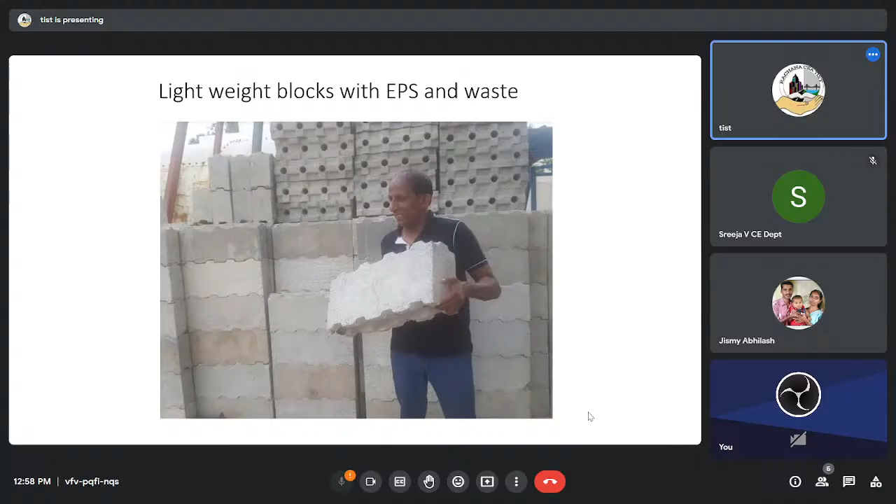So then we talk about green technology, green buildings. I think there are many out-of-the-box solutions you can find to make a building green, and especially we have green technology for that. In Sri Lanka, we have the Green Building Council, and they especially look at and promote this. If you have a rainwater harvesting system, then you get points in the approval process. I think in India it's also compulsory, as I've learned, in some states of India. So there are many such areas we can work on.

Then, the challenges of green technology - yes, we can say green technology, but still it's associated with cost. That cost can be cut down by innovative solutions only. So these are the areas I think the university, academia, and industry need to get together and do research. Still a wide area to be covered to find solutions.

Finally, I just wanted to mention the role of ASCE in sustainable development. If you go to the ASCE website, there's a separate section for sustainable development and innovative solutions. We have a 2070 plan - floating cities and various concepts have been proposed to address future sustainable targets. When you are free, you can refer to our website and collect, read, and gather very important information from there, about how we, as a professional body, are prepared and working towards sustainable development in the future.

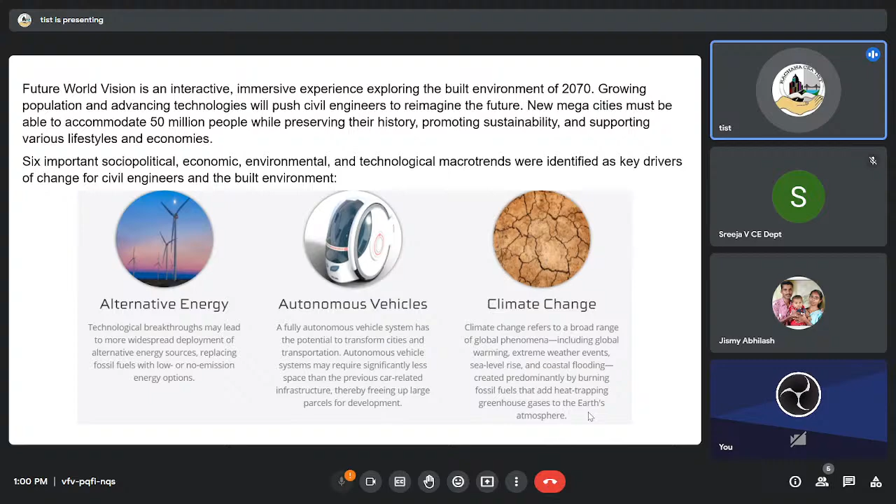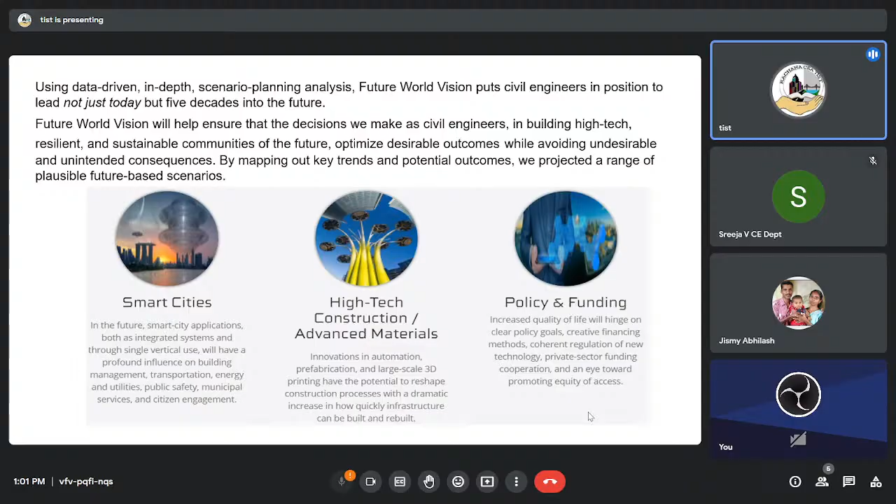Yes, smart cities, high-tech construction, advanced materials, policy and funding. Actually, this is also more important - rather than just doing research and finding various alternative solutions, at the same time we need to be ready with the regulatory mechanism to implement it. So that's also an important aspect. Sometimes we forget, but we have already paid attention to how to address the policy issues as well as the funding.

With that, I would like to conclude my presentation. Basically, I tried to emphasize the need for sustainability, why we need to be concerned about this main area, and then as the next step, to be innovative. In your conference, I went through the proposed program - it has addressed mainly all the sectors, and there are very interesting papers there, I saw. So I think this is what we do, and thank Dr. Vasudev and the team for organizing this and selecting this.